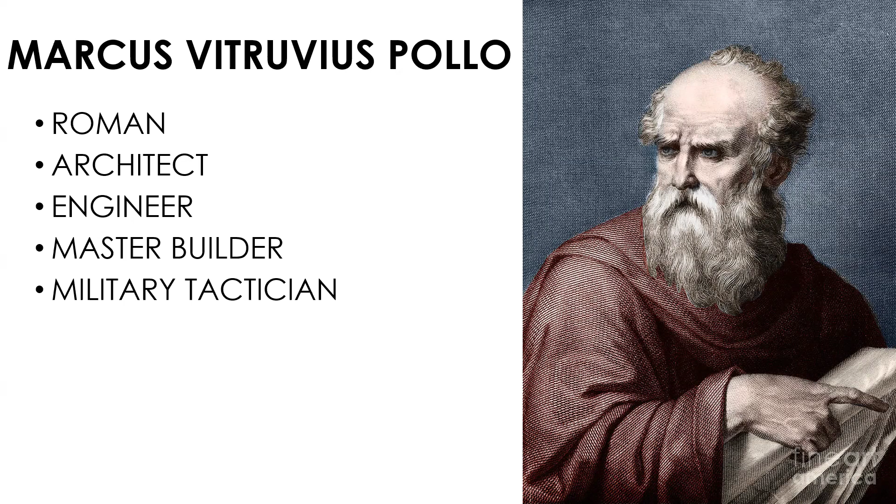Concrete was discovered by the Roman Empire. There is also an interesting myth that they discovered it by accident. The information and history about this material was written in Book 2 of the 10 Books on Architecture by Marcus Vitruvius Pollo. He's an engineer, an architect, also known as the master builder, and a military tactician. The 10 Books on Architecture is one of the surviving treatises of construction used by the Roman Empire.

The books were written as a gift to Emperor Octavian and serve as a manual on how to build an empire. Vitruvius is pretty much a very smart person considering he was an engineer, architect, a master builder, and also a military tactician.

It's amazing. After Vitruvius, there are also scientists that explored these ideas, one of which is a world-renowned architect, artist, and scientist during the Renaissance period named Leonardo da Vinci. One of his famous works is the Vitruvian Man, inspired by the concept of anthropometrics.

Going back to concrete, the story began near Mount Vesuvius, the famous mountain and a very active volcano in Italy. The magma from the mountain hits the earth surrounding the volcano, causing the surrounding earth rocks to dry out. This substance can be crushed into powder form and then turned into its original state by just adding water and then drying it.

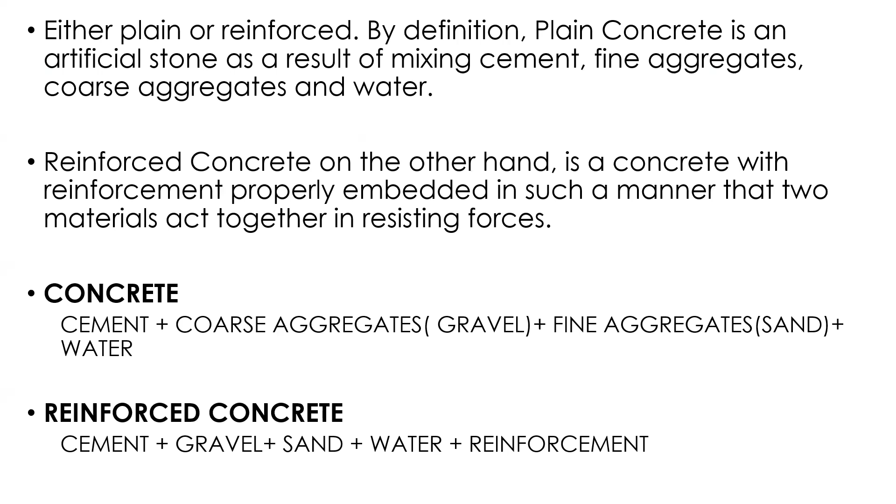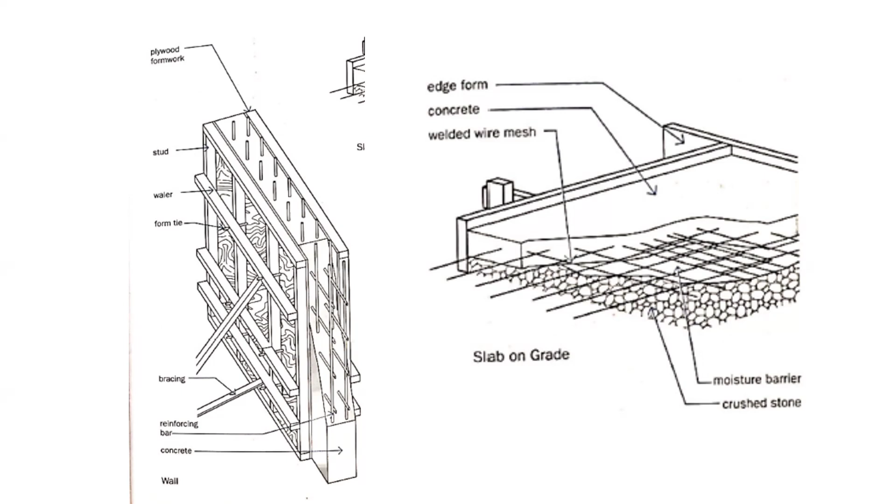An example of a reinforced concrete wall and a slab on grade. As you can see, you need to put formworks since concrete is in its liquid state, and through hydration it turns into solid. You need to provide formworks to mold the shape — if you're doing a wall, then you need to provide formworks that is upright.

So what are the components of cement? Since cement is a product of the earth, the materials can also be found in other earthen materials. First is lime, 60 to 65%. As you can observe, lime is the predominant material in concrete. Next is silica, 18 to 25%.

Are all cements the same? The answer is no. There are many kinds of cement that you can use depending on your special requirements, special needs.

The cement types are: ordinary Portland cement, for general use, which is readily available in your local hardware stores. Next is rapid hardening Portland cement, which is preferred when high early strength of concrete is desired. This is recommended for road construction and infrastructure.

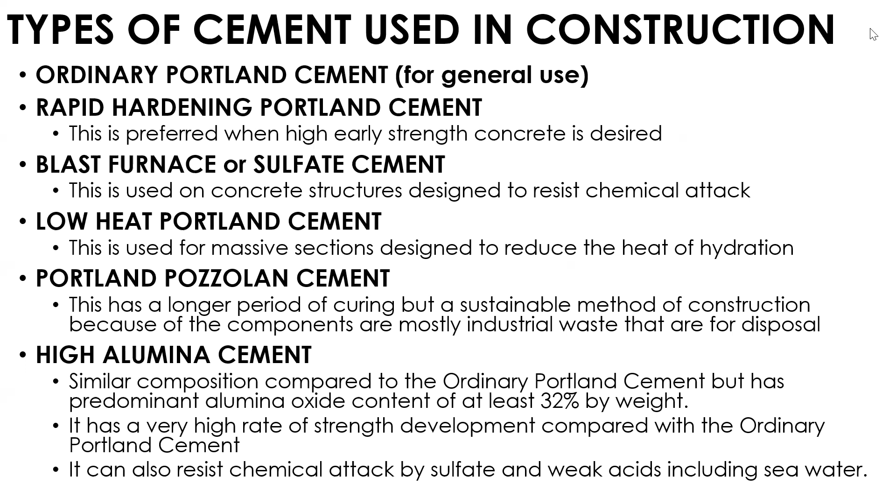It can also resist chemical attacks by sulfate and weak acids, including seawater. This can also be used in industrial application and coastal infrastructures.

Next is aggregates. You mentioned earlier the fine and coarse aggregates. What's the difference between the two?

There are two classifications of aggregates: coarse and fine. The coarse aggregates include crushed stones, gravel, and natural gravel retained on a 5 millimeter sieve.

A 5 millimeter sieve, I provided an illustration. It's like a filter. It says that if the aggregate was retained in a 5 sieve, it means it's a coarse aggregate. And then if it passes through, then it's a fine aggregate.

There's an example of that, a 5 sieve. This device is used to segregate coarse aggregates from fine aggregates.

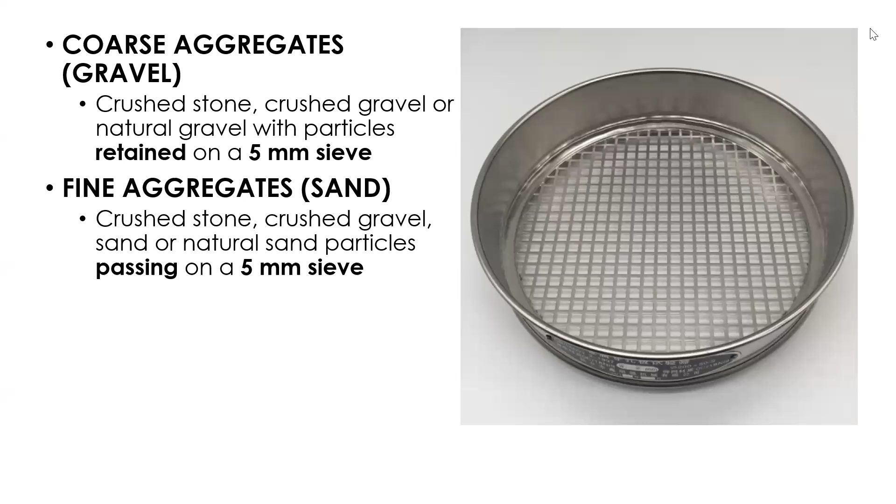There are also criteria for choosing the right size of aggregates. Let us read first the 4 bullets and then we'll discuss the example. For the coarse aggregate, the maximum nominal sizes vary from 40 to 10 in diameter.

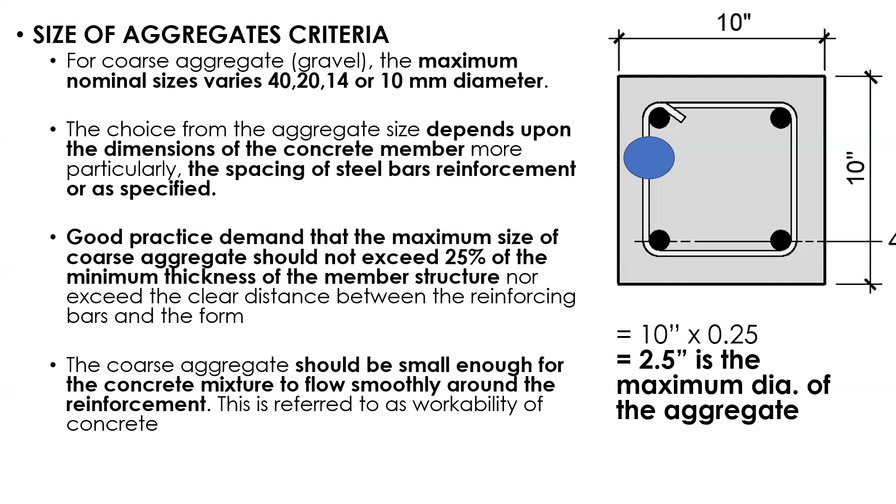The coarse aggregate should be small enough for the concrete to flow smoothly around the reinforcement. It should be workable, not something that's difficult to pour. If it's not workable, it's difficult, it can cause delay, the concrete might harden before you finish pouring it properly. For the visual method that I learned from masons in construction...

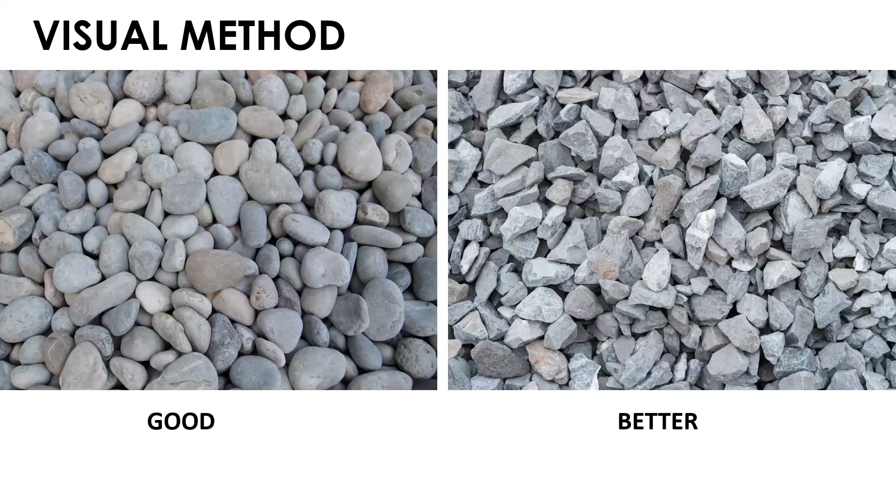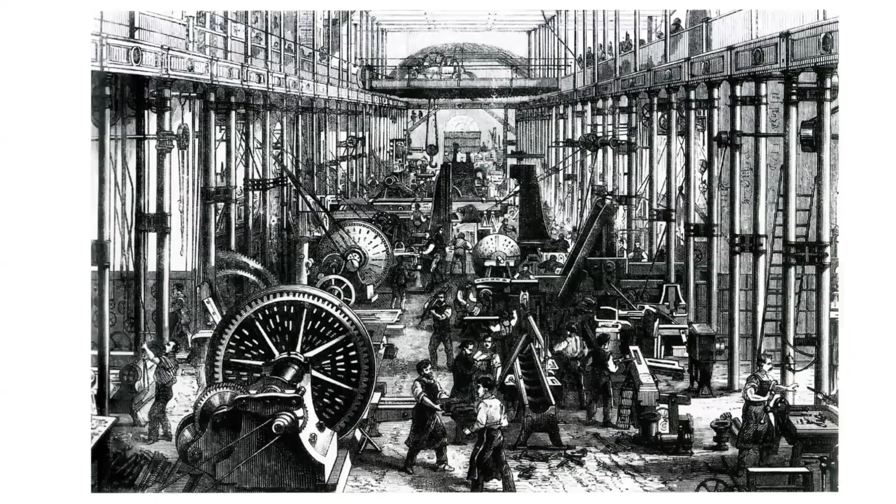And then came the first industrial revolution, which began in Britain. The mass production of steel began, and the use of steel was widespread from transportation, communication, and construction, to say the least. For you to imagine the industrial revolution, think of mass production of products.

And then in 1855, there was a French civil engineer who used reinforcement in concrete and discovered reinforced concrete. The amazing thing about concrete was it was discovered in Rome and was shared to different places, then developed into something that performs better in France by infusing metal reinforcement to concrete, making it more economical by using less concrete. Therefore, reinforced concrete became accessible to the public.

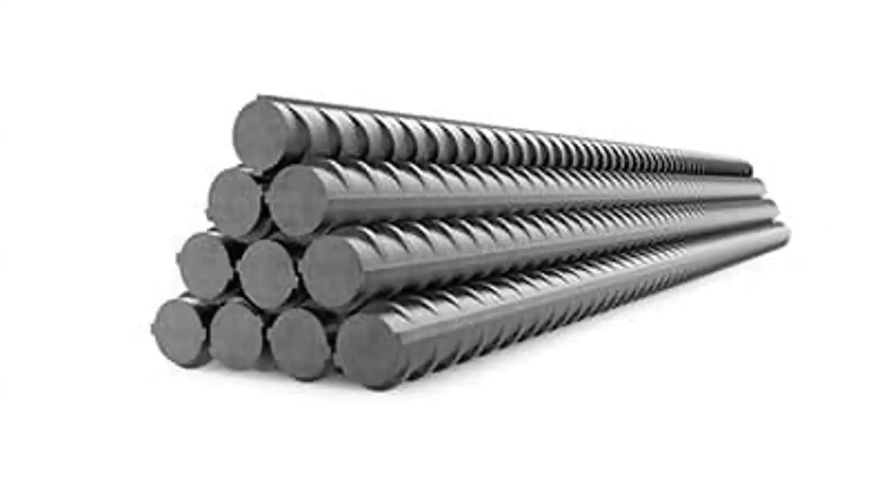Without reinforcement, concrete would have to be thick and massive to function properly, just like the Romans did. It's like the illustration earlier - Romans built massive thick walls in order to build higher. By infusing steel, you need to use less concrete, and then you can build higher.

Fortunately, steel and concrete are chemically compatible and have a similar rate of dimensional change due to temperature. This means that if the concrete and steel expand, although they don't have the same thermal expansion, it doesn't cause disruption to their composition once thermal expansion happens. Because when the temperature is high, material tends to expand, and when the temperature is lower, it tends to contract.

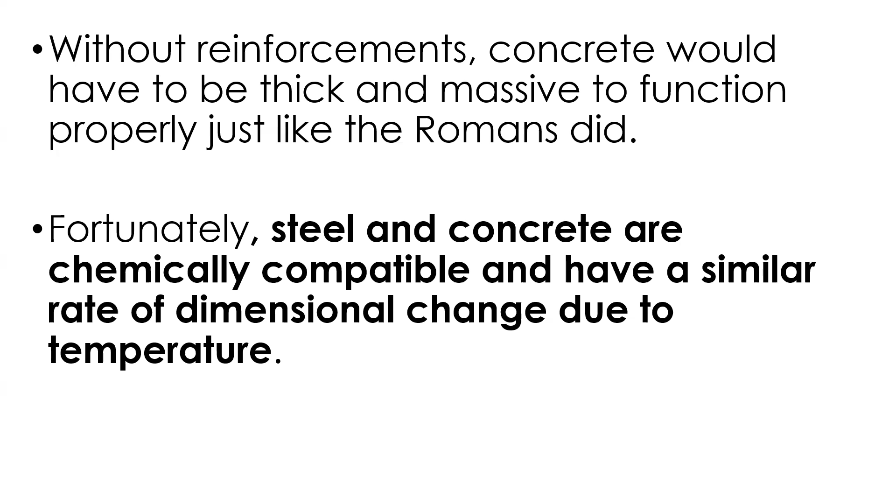Here are the principles of mixing concrete. The following principles of concrete are to produce the optimum concrete that is workable. It should also be high in strength, durable, and economical.

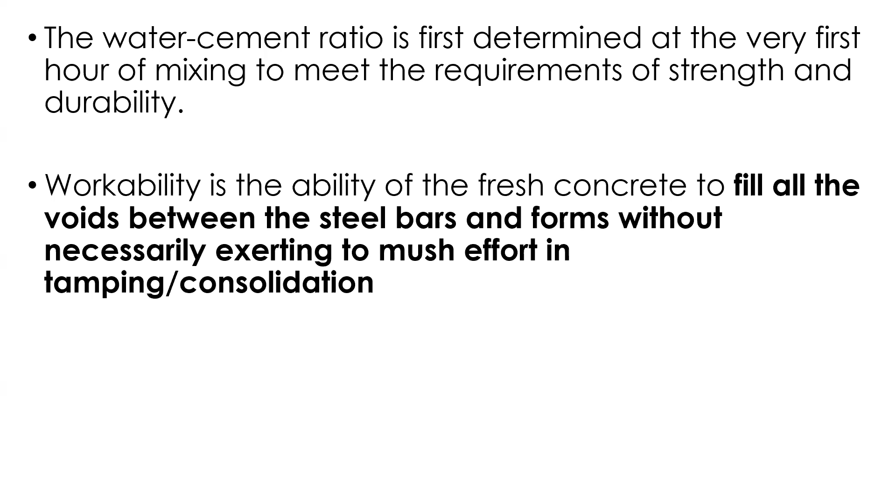Next is the ACI requirements for concrete. By the way, ACI stands for American Concrete Institute. It is an institution in regulating the use of concrete, which can be improved through researches to improve the performance.

Here are their requirements for concrete. Fresh concrete shall be workable, meaning that fresh concrete could freely flow around the reinforcement to fill all the voids. The hardened concrete shall be strong enough to carry the design load - the structural engineer's design should be correct, because a high-performance concrete with good reinforcement is useless if the columns are undersized. The material should be good and the design should be correct.

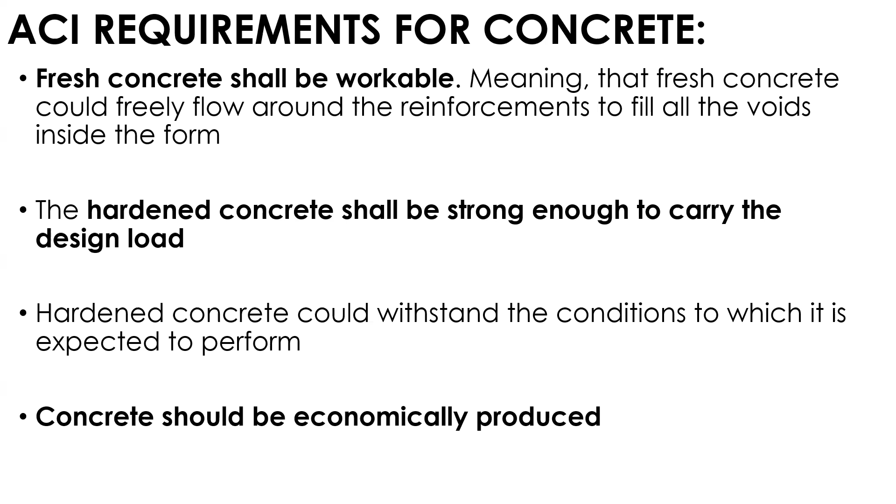Hardened concrete should withstand the conditions to which it is expected to perform. And lastly, concrete should be economically produced - it should not be energy intensive or overly massive to the point that it's no longer sustainable, over-designed.

What's the sequence of mixing concrete? There are plenty of methods, but I will discuss the most basic ones. There are two: the manual method and the bagger mixer method. The manual method can be done using a trowel or a shovel. Let's discuss the manual method first.

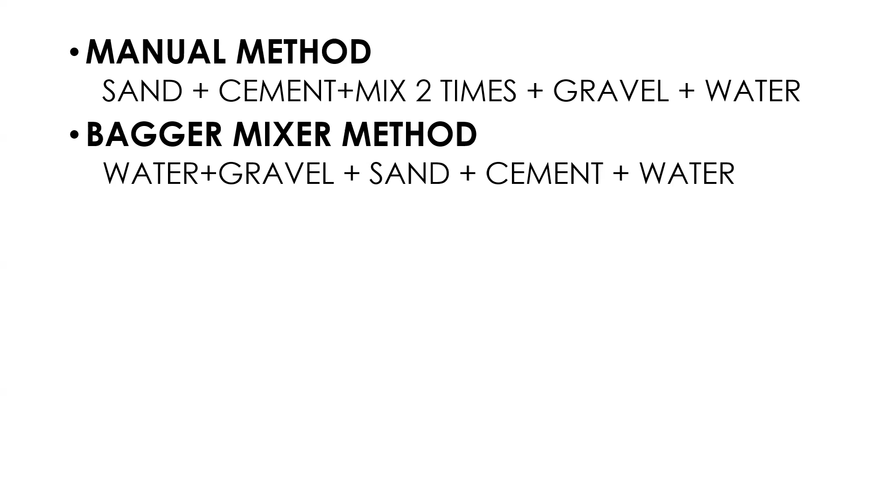After mixing the concrete, let us proceed with placing and curing it. Concrete is cured by hydration, a binding chemical combination of concrete, cement, and water. The aggregates, cement, and water react - the cement reacts, then the water evaporates, leaving the concrete mix with only the cement, fine aggregates, and coarse aggregate remaining. That's the process of hydration. It's not just overnight, nor 15 days - it's 28 days for curing concrete.

Surfaces can be kept moist by spraying them with water. You wet it for 28 days so the drying of the concrete is even, or by covering them with moisture-resistant sheets. Covering with resistant sheets is used when you're pouring a slab, because a slab is large and dries quickly since it's always exposed to the sun. So you wet it, then cover it, then repeat for the next few days or depending on if it's already dry.

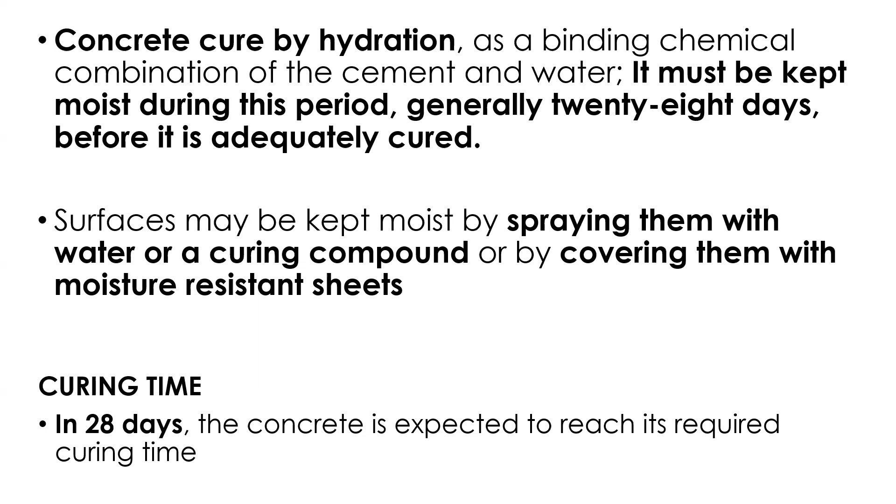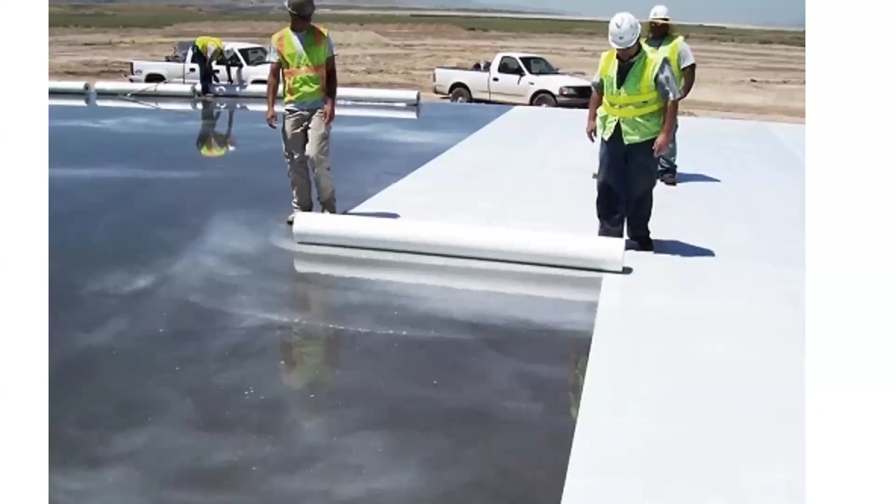An example of spraying - after removing the forms, after pouring, this is always done: curing of concrete, and then covering.

And for the admixtures, what are admixtures? These are admixtures to alter the properties of the concrete. It can be used as allowing it to set immediately or to extend the life. Here are examples: accelerator, retardant, air entraining, corrosion inhibitors, and fibrous admixtures.

This is usually in liquid form or in powdered form. For the accelerator, it has the ability to promote set, faster setting time.

And for the retardant, it's the opposite, it can delay the curing. And for the air entraining, it increases workability of wet concrete, aids in reducing freeze-thaw damage, and can be produced in lightweight thermal insulated concrete.

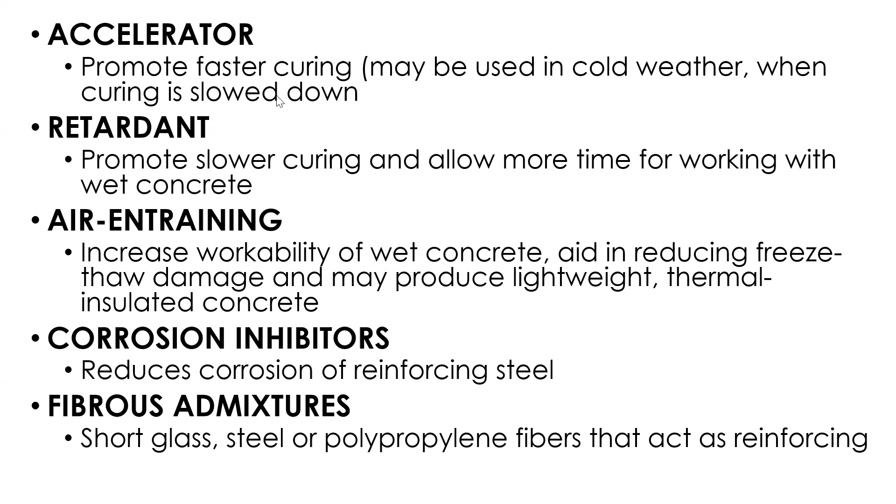These are like plastic, polypropylene fibers. They're mixed in during the pouring of concrete, improving the adhesion.

Next is the silica fume. Produces extremely high strength concrete with very low permeability. And for the super plasticizers, high range water reducing admixtures, it also improves the workability of concrete.

A famous brand for super plasticizers is Sika, water reducing admixtures to allow more workability by requiring less water. For fly ash, similar to silica fume and the blast furnace slag also.

By the way, those are industrial waste that are for disposal. And for pozzolans, it can improve workability, reduce internal temperature while curing, and reduce reactivity caused by sulfates. And also for the coloring agents to alter the appearance of the concrete for finishing purposes.

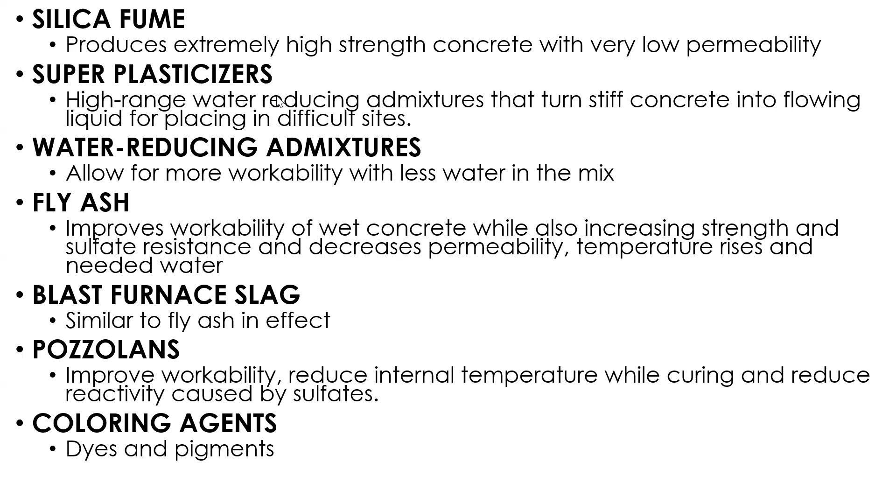That's it, concrete as finishing. Since concrete is a beautiful material, some architects or designers intend to show concrete as it is. It can be used as cast without painting it.

And for the next example, blasted can be used by sandblasting. Smooth the surface while exposing successive levels of cement, sand, and aggregate. Basically, sandblasting is putting texture on the concrete.

For the chemically retarded, same purpose, to expose the aggregates. And for the mechanically fractured, tooling or hammering, jackhammering, and scaling produce varied aggregate exposing effects.

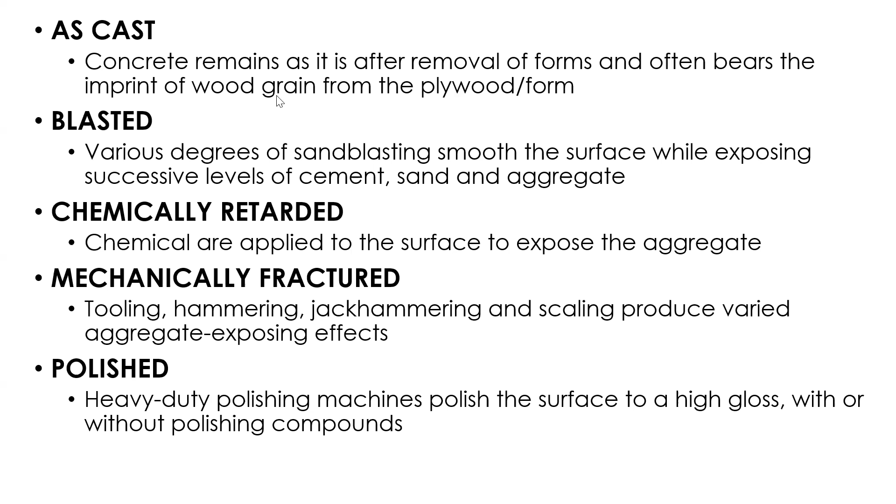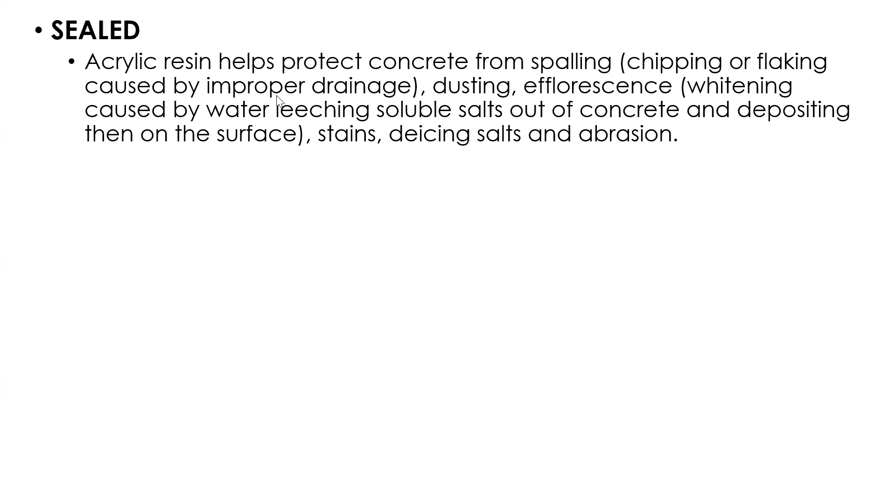Next, polish, making the concrete glossy. This is very common in warehouses, in industrial buildings, even schools. They use polished concrete. And for seal, it's the same with polished concrete, but it has an acrylic or epoxy layer for protection.

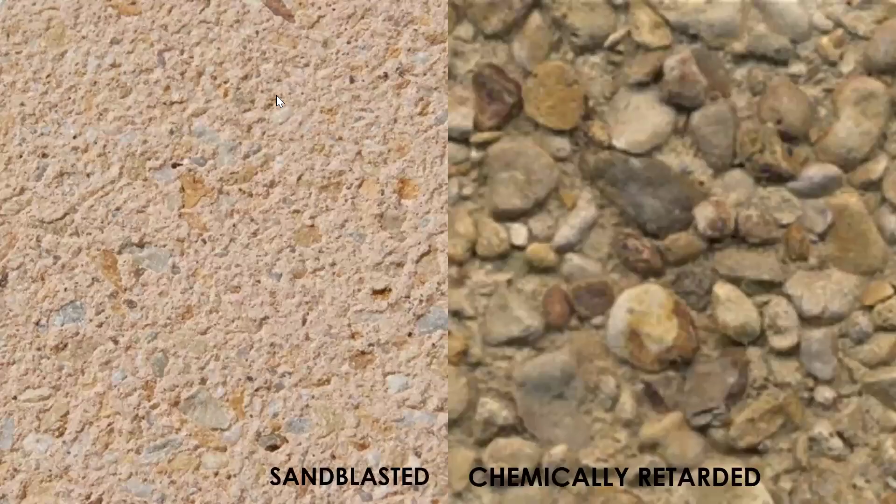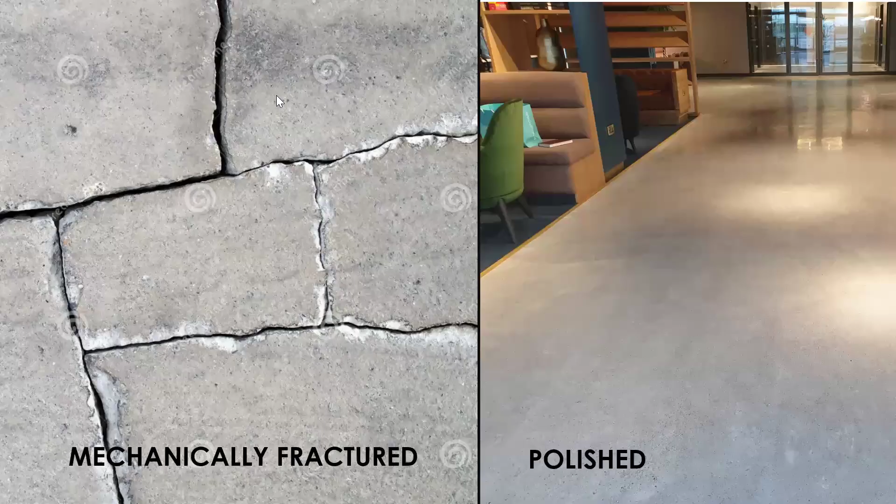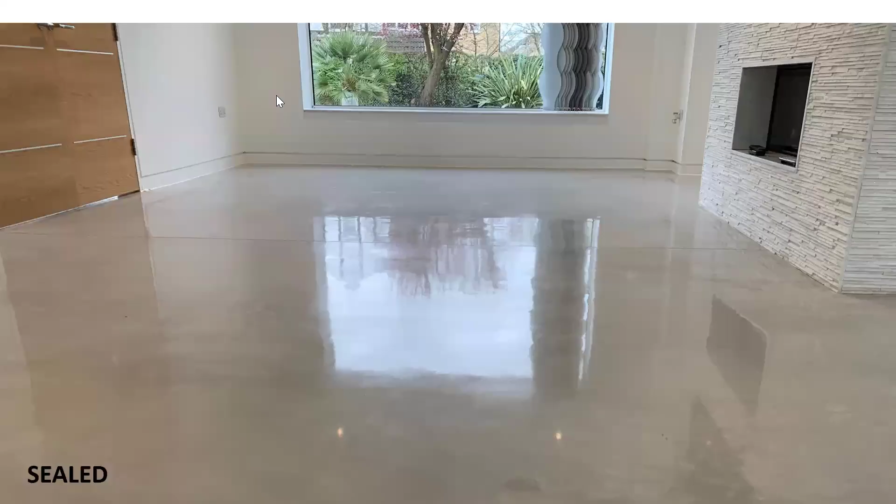And for colors, coloring concrete, there are also methods to alter the color of concrete, two of which are integral coloring applied in wet concrete, making it homogeneous, and dry shake color hardeners, applied on top of concrete before the curing time.